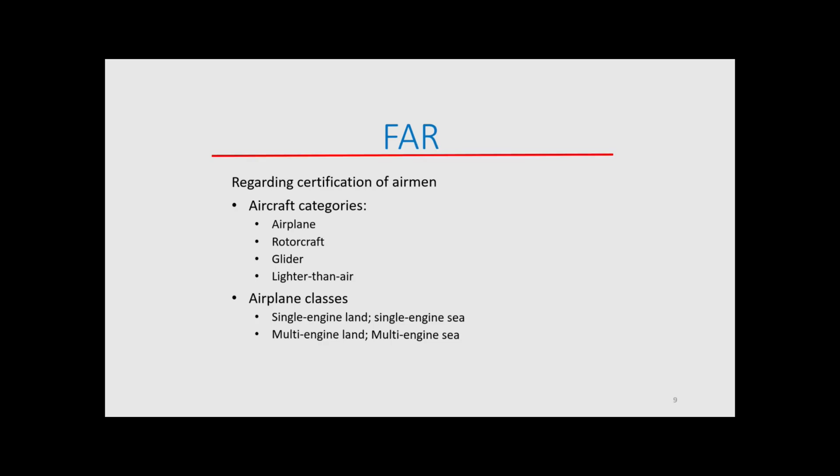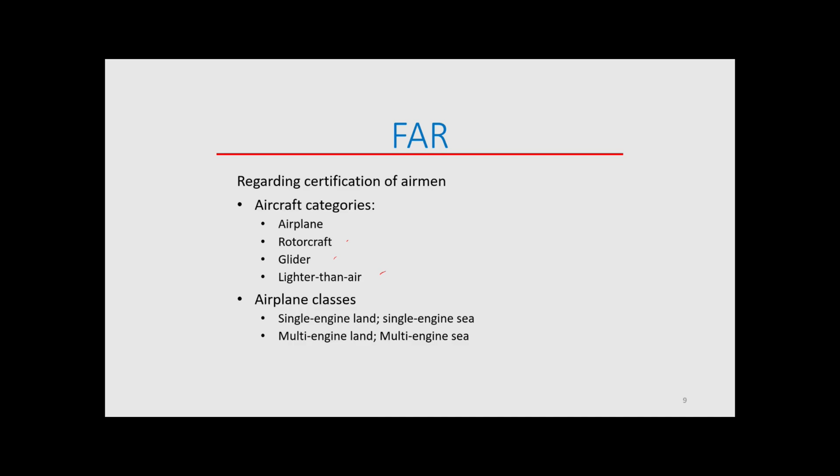Regarding the certification of airmen, these are aircraft categories: airplane, rotorcraft, glider, lighter than air. These are the large categories that aircraft fall under. Then there are airplane classes, like single-engine land, single-engine sea. So you'll see something like airplane single-engine land, airplane single-engine sea, airplane multi-engine land, or multi-engine sea.

Let's review. For recency experience, what is considered nighttime? You got it. 1 hour after sunset and 1 hour before sunrise.

Explain category versus class regarding the certification of airmen.

Regarding the certification of aircraft, these are categories: there's transport, normal, utility, limited, restricted, acrobatic, and provisional.

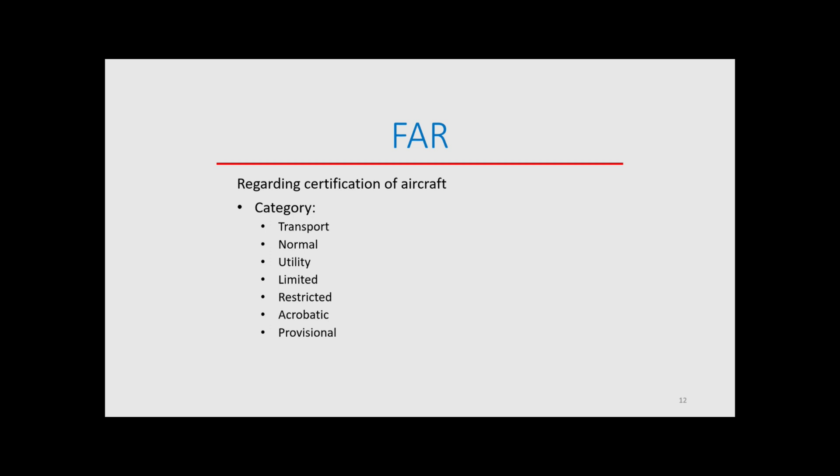Here are some abbreviations worth keeping in mind. VFE stands for Maximum Flap Extended Speed. VLE stands for Maximum Landing Gear Extended Speed. VNO is Maximum Structural Cruising Speed. VA is Maneuvering Speed. VSO is Stalling Speed in the landing configuration. VX is the speed for your best angle of climb. And VY is the speed for the best rate of climb.

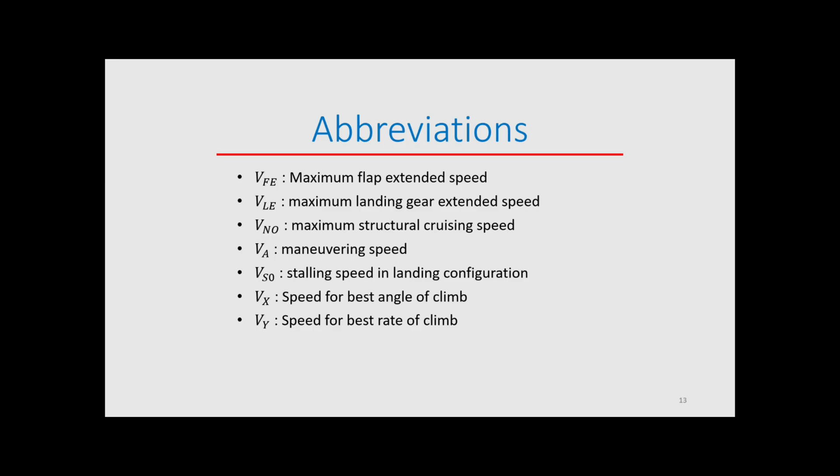Keep in mind your airworthiness certificates remain in force as long as maintenance and alteration of the aircraft are performed per the regulations. An AD is an airworthiness directive issued under Part 39, and these are required corrections for unsafe conditions. They must be complied with unless they give a specific exemption in the AD. Remember, you can't operate a product to which an AD applies except in accordance with the requirements of that AD. That means that if the AD says you don't have to comply with it, then you are allowed to not comply with it. But in that case, you would be complying with it anyways. I think it's just a goofy situation. Anyways, keep that in mind.

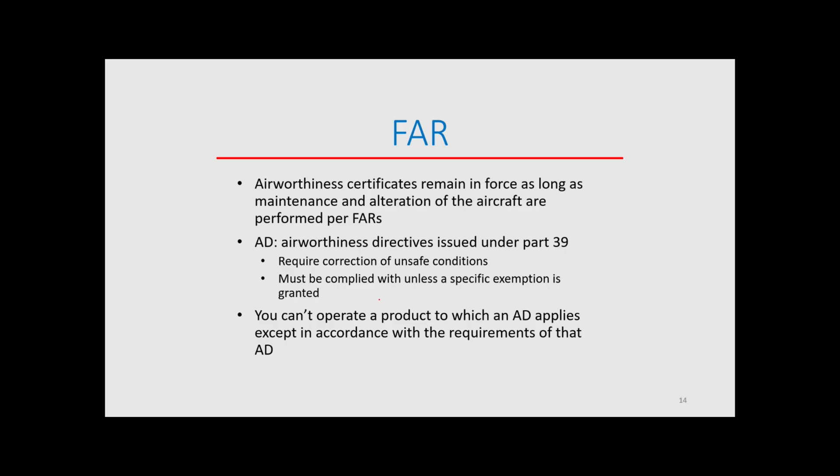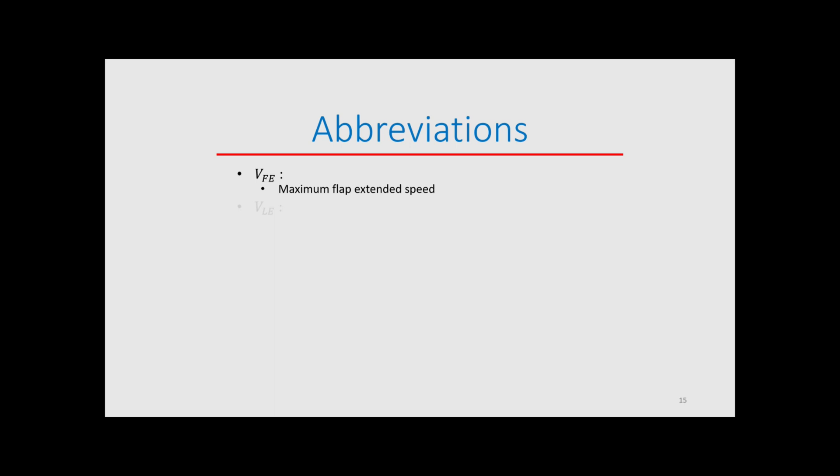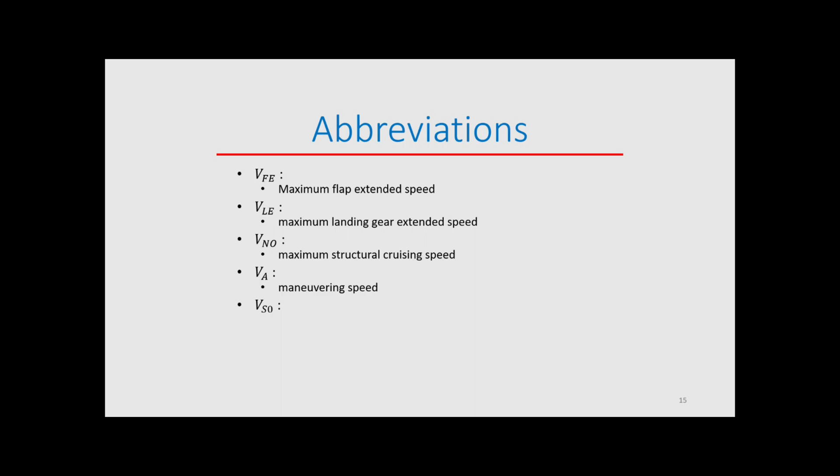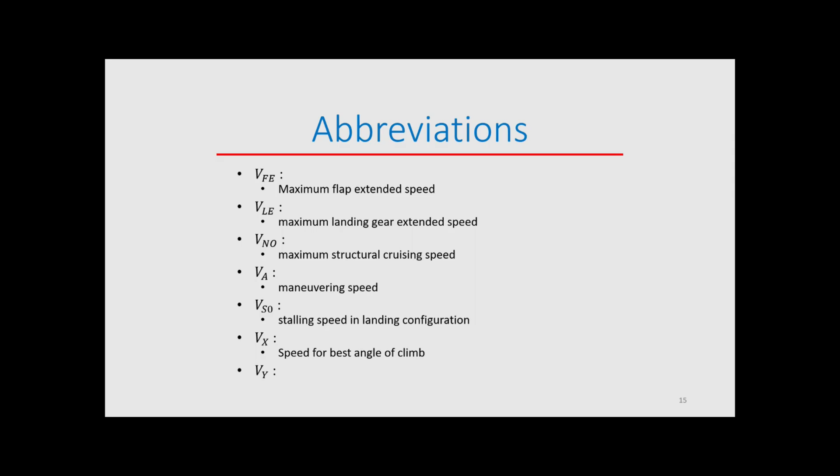So let's go over some abbreviations. What is a VFE? You got it, Maximum Flap Extended Speed. VLE? That's the landing gear one. VNO, maximum structural cruising speed. VA, maneuvering speed. VSO, that's the stalling speed in the landing configuration. Vx, that's the speed for your best angle of climb. And Vy, that's the speed for the best rate of climb. Nice, you got it.

Like I said before, Part 43 covers maintenance. It says that a person who holds a pilot certificate may perform preventative maintenance on any airplane owned or operated by that person that is not used in air carrier services. Preventative maintenance means simple or minor preservation not involving complex assembly. So if you're not tearing apart the engine, if you're just doing oil changes or something minor, that's preventative maintenance. And you, as a private pilot, are authorized to perform that maintenance.

To approve the airplane for return to service after the maintenance is done, the pilot must hold at least a private pilot certificate. And after your work is done, you should sign the aircraft logbook with a signature, certificate number and date, and description.

Let's recap. Airworthiness certificates remain in force as long as what?

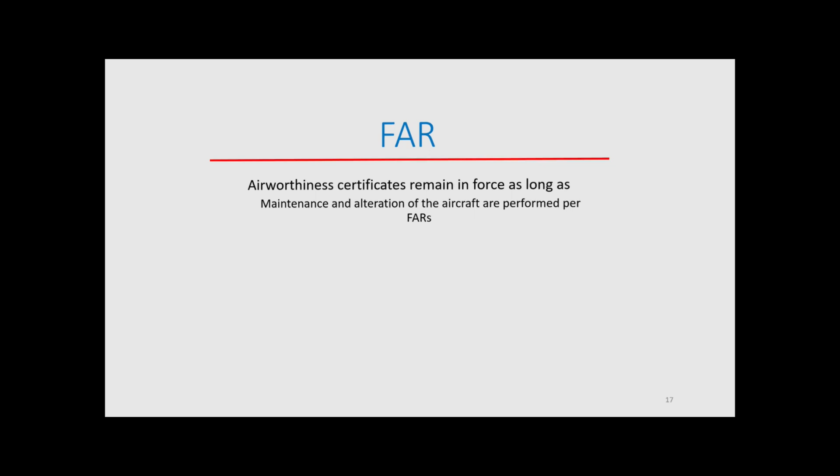Maintenance and alteration of the aircraft are performed per the regulations. Who may perform preventative maintenance? That's right, a person with a private pilot certificate. Remember, Part 61 covers how to earn your certificate, and Part 91 is how to keep it. When acting as pilot in command or as a required pilot flight crew member, you need these documents: a valid pilot certificate, your medical, and photo ID, and these must be readily accessible in the aircraft. If an officer of the law, the FAA, or an NTSB officer requests it, you must present your certificate and your medical.

Let's recap. Airworthiness certificates remain in force as long as maintenance and alteration of the aircraft are performed per the Federal Aviation Regulations. When acting as PIC or as a required pilot flight crew member, what documents do you need? That's right, your pilot certificate, your medical, and your photo ID.

Continuing on with Part 61, let's get into alcohol and drugs. In general, you don't want to be doing alcohol and drugs before you fly. You need to provide a written report of each motor vehicle action involving alcohol or drugs to the FAA Civil Aviation Security Division no later than 60 days after a motor vehicle action. It's best not to mix alcohol and drugs with driving or flying, that's going to keep things simple. But in the event that you do, you want to notify them again no later than 60 days after the motor vehicle action.

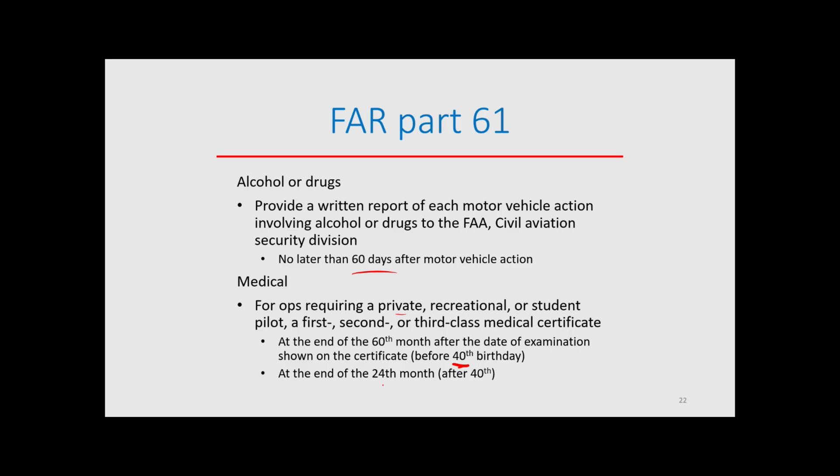To act as pilot in command of a high-performance airplane, you must receive and log ground and flight training and receive a logbook endorsement. That means anything greater than 200 horsepower. You also need a type rating for any of these: an aircraft greater than 12,500 pounds, a turbojet, or anything else that the FAA has decided you need a type certificate for.

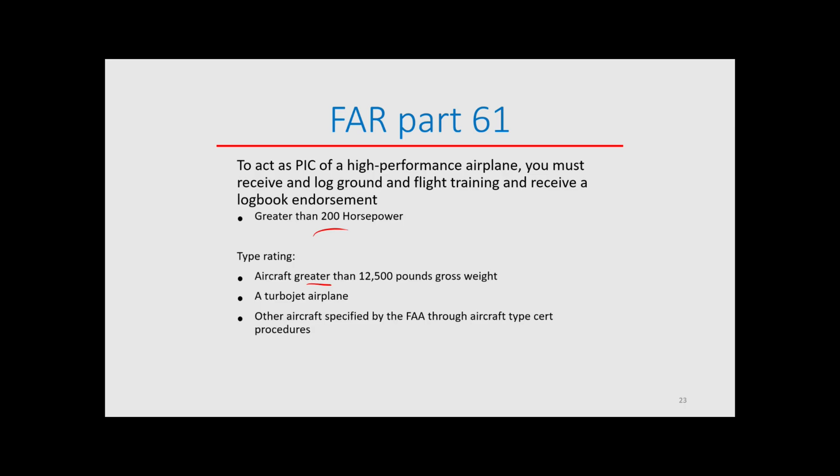You are required to come back every 24 calendar months for a flight review. That is 1 hour of ground training and 1 hour of flight training, basically to make sure that you are staying up to date with everything that's going on in the aviation community.

To be a pilot in command and take up passengers, you need to perform 3 takeoffs and landings in the preceding 90 days in the same category, class, and type if required. And if you're flying a tailwheel, these must be to a full stop. And if you're flying at night, they must also be to a full stop.

What must you perform and log if you want to fly with passengers as a private pilot? That's 3 takeoffs and landings in the preceding 90 days in the same category, class, and type if required.

Going on with our Part 61 discussion, if you move and you have a change of address, you must notify the FAA in writing. You may not use your certificate after 30 days after moving unless you notify the FAA.

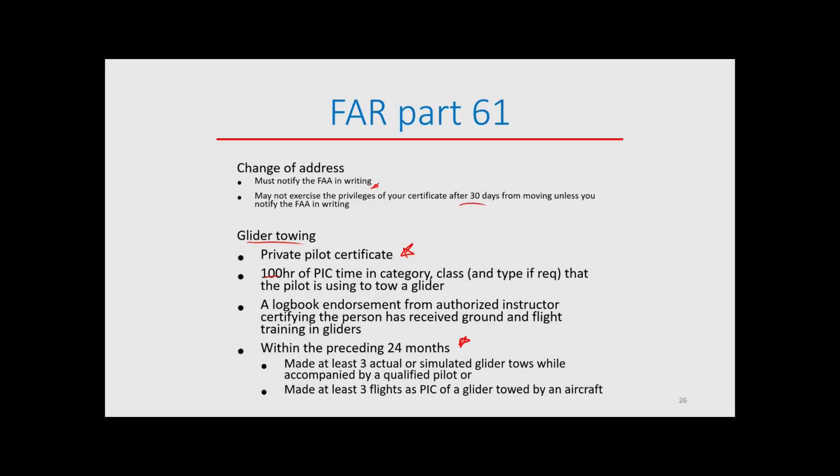If you want to tow gliders, you need to have at least a private pilot certificate. You need 100 hours of pilot in command time in the same category, class, and type, if required, that you're using to tow that glider. And you need a logbook endorsement from an authorized instructor certifying that the person has received ground and flight training in gliders. You must also, in the preceding 24 calendar months, make at least 3 actual or simulated glider tows while accompanied by a qualified pilot, or make at least 3 flights as PIC of a glider towed by an aircraft.

Part 61 limitations: private pilots may not pay less than the pro rata share of operating expenses. That means if you and two buddies are flying in the aircraft, you each need to pay your share of the flight. If there are 3 of you, you need to pay at least 1/3 of the flight costs.

That includes any fuel, oil, or airport expenditures or rental fees, at least the pro rata share. And you may only fly for a business if it is incidental. For example, if you are flying to meet a client to sell them guitars, and the flight is just to get you from point A to point B, that's fine. But if you're flying passengers around for that business, that's not authorized, and it would fall under commercial operations.

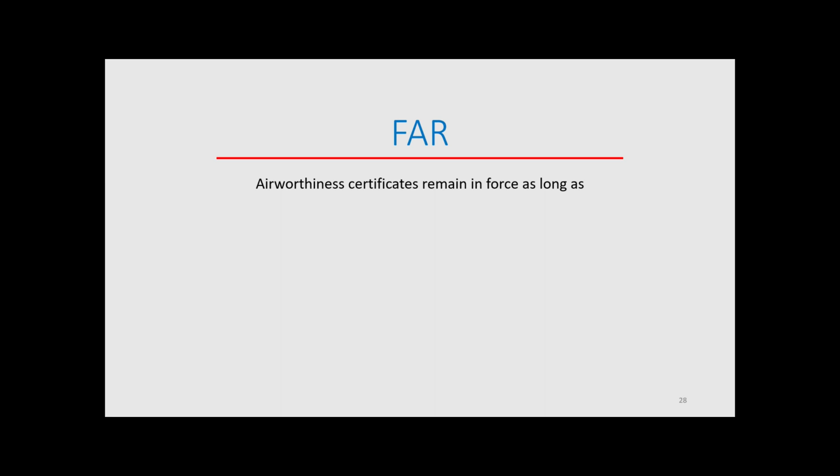Airworthiness certificates remain in force as long as maintenance and alterations of the aircraft are performed per the FARs.

When acting as PIC or as a required pilot flight crew member, what documents do you need? That's the 3: the pilot certificate, medical, and your photo ID.

What must you perform and log if you want to fly with passengers as a private pilot? You got it: 3 takeoffs and landings in the preceding 90 days in same category, class, and type if required.

Going on with Part 61, you may fly as pilot in command for a charitable organization for which passengers make donations if the following conditions are met. The FSDO is notified at least 7 days before the flight. FSDO stands for the Flight Standards District Office. The flight is conducted from an adequate public airport.

The pilot has logged at least 500 hours. No acrobatics or formation flights are performed. The aircraft holds a standard airworthiness certificate and is airworthy. The flight is conducted in day VFR conditions, is nonstop, begins and ends at the same airport, and is conducted within a 25 nautical mile radius of that airport. If you do all this, then you can fly for a charitable organization that passengers make donations to.

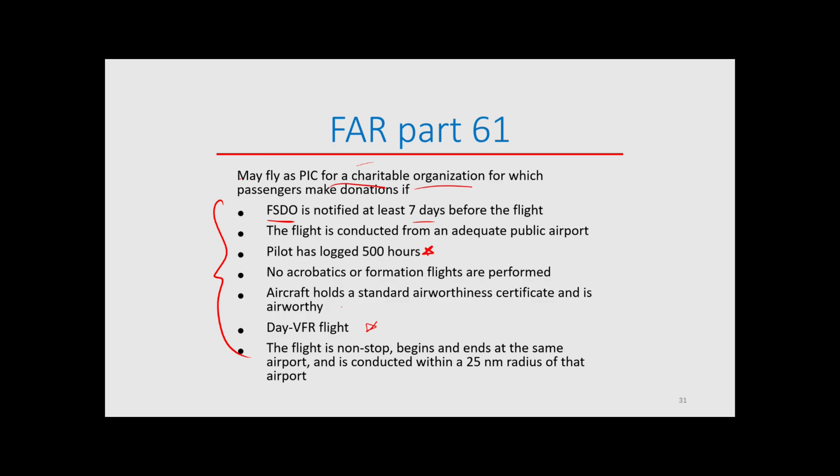So your friend wants to pay you for flying, to thank you for flying him around. Is this authorized? Of course not. You must pay at least your share of the flight.

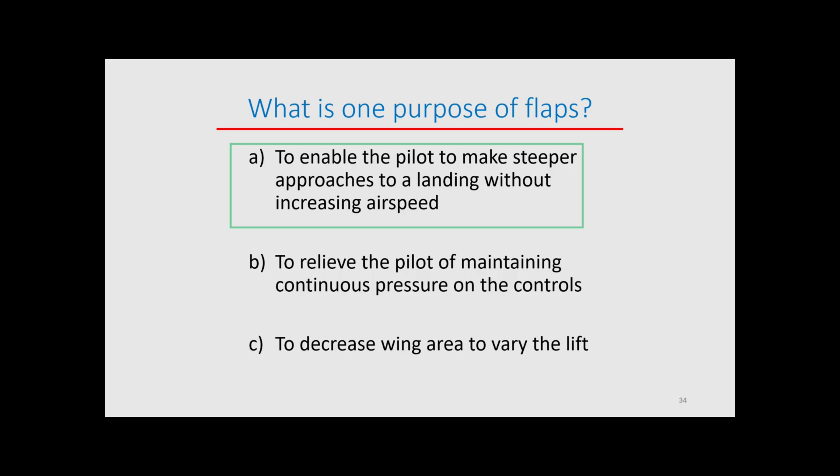What is one purpose of flaps? To enable the pilot to make steeper approaches to a landing without increasing airspeed.

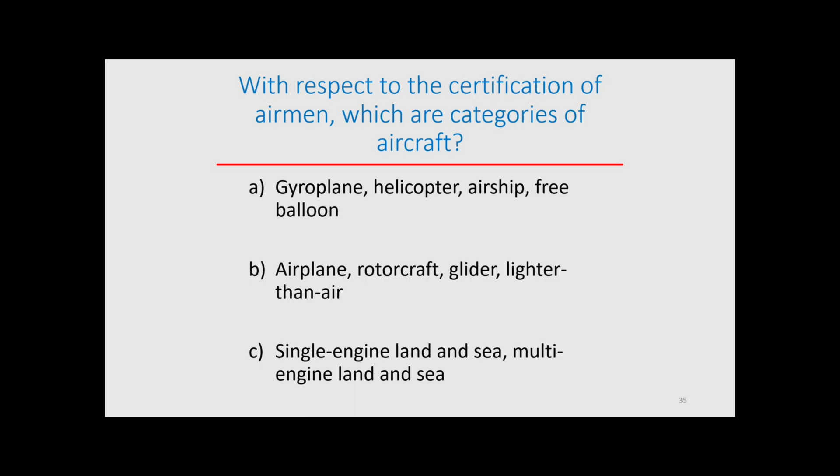With respect to the certification of airmen, which are categories of aircraft? Airplane, rotorcraft, glider, and lighter than air.

Which V speed represents maximum flap extended speed? VFE.

How long does the airworthiness of an aircraft remain valid? As long as the aircraft is maintained and operated as required by the Federal Aviation Regulations.

Which statement relates to Bernoulli's principle? Air traveling faster over the curved upper surface of an airfoil causes lower pressure on the top surface.

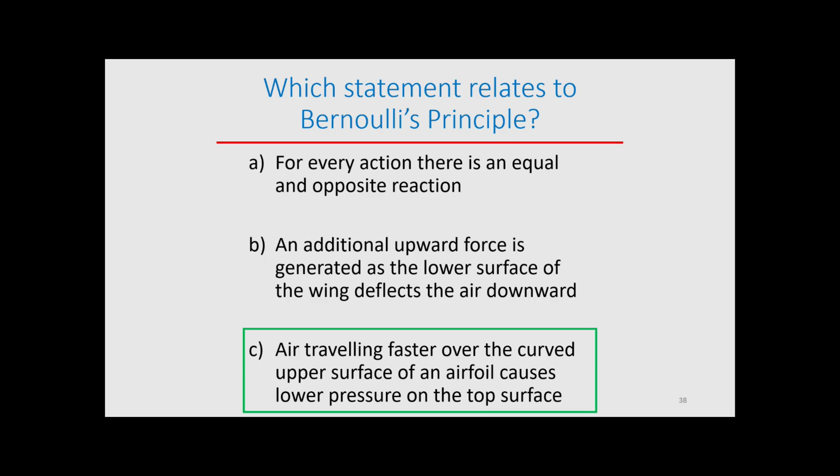What should an owner or operator know about airworthiness directives? They are mandatory.

Who may perform preventative maintenance on an aircraft and approve it for return to service? A private or a commercial pilot.

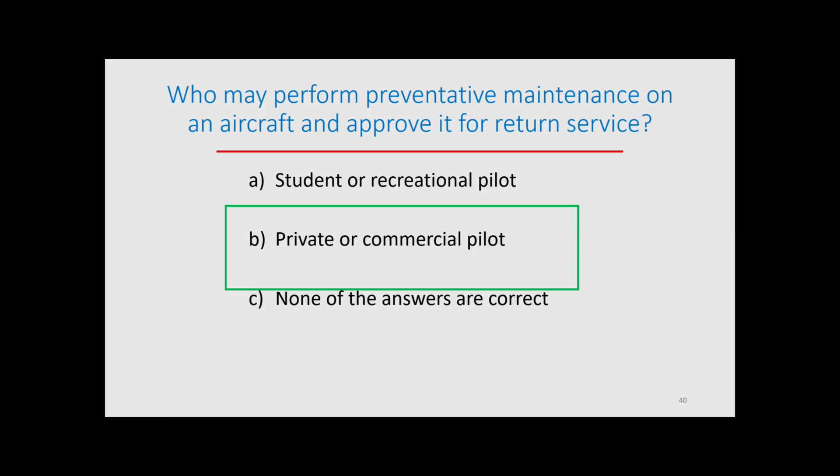Which operation would be described as preventative maintenance? Servicing the landing gear wheel bearings.

When must a current pilot certificate be in the pilot's personal possession or readily accessible in the aircraft? Anytime when acting as pilot in command or as a required crew member.

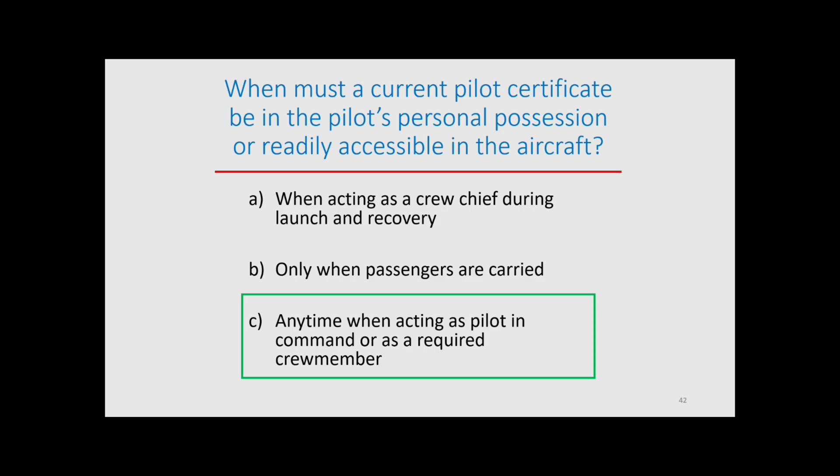A third-class medical certificate is issued to a 36-year-old pilot on August 10th of this year. To exercise the privileges of a private pilot certificate, the medical certificate will be valid until midnight on August 31st, 5 years later.

The pilot in command is required to hold a type rating in which aircraft? An aircraft having a gross weight of more than 12,500 pounds.

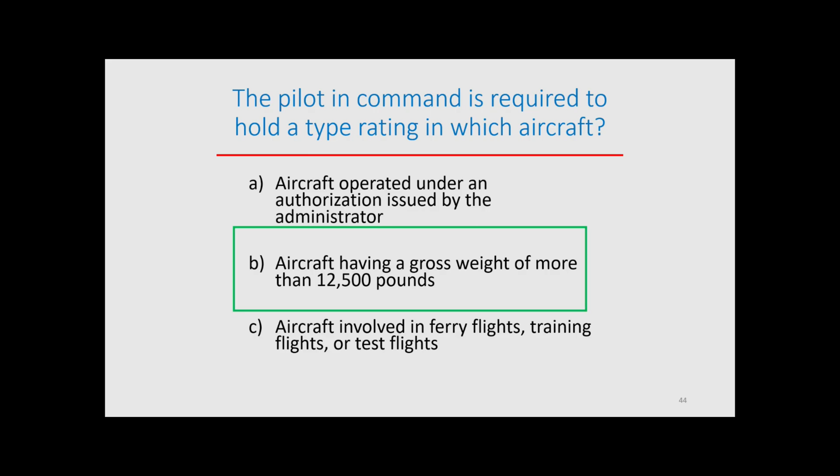If a private pilot had a flight review on October 30th of this year, when is the next flight review required? October 31st, 2 years later.

Your brother wants you to take him flying. You must have made at least 3 takeoffs and 3 landings in your aircraft within the preceding 90 days.

What exception, if any, permits a private pilot to act as pilot in command of an aircraft carrying passengers who pay for the flight? If a donation is made to a charitable organization for the flight.

Wingtip vortices created by large aircraft tend to sink below the aircraft, generating turbulence.